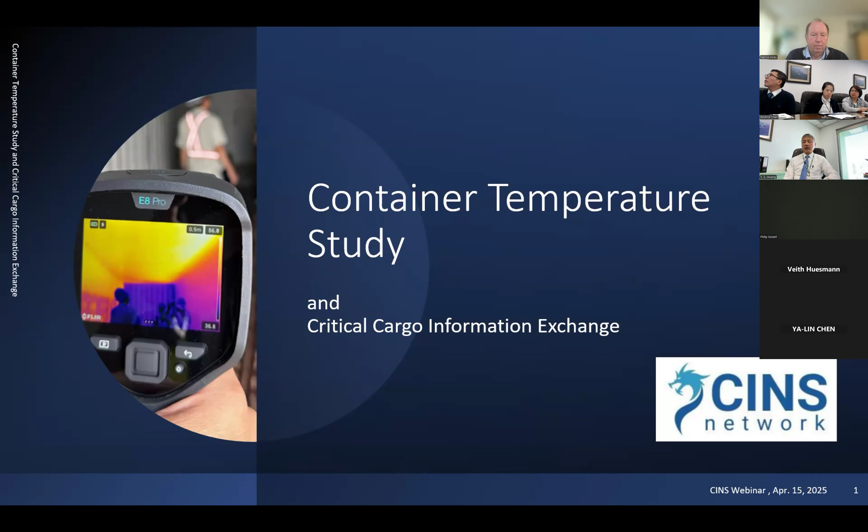Thank you. So today's topic is container temperature study and critical cargo information exchange, which we feel are two crucial elements to build a safer container transportation environment for all working in this industry. Next page, please.

In today's briefing, the first part is the fire risk and the information exchange, which we will explain more in the following briefing. The second part will be two cornerstones we feel are crucial: one is the understanding of container temperature, and second is the attribute code that SMDG developed, still under development, but I think it is also ready for all stakeholders to adopt. The third part, the main part, is the update of the temperature study. The next will be the attribute code SMDG, and number 5, ongoing task, and lastly, a safer environment. That's what we are looking for. Next page, please.

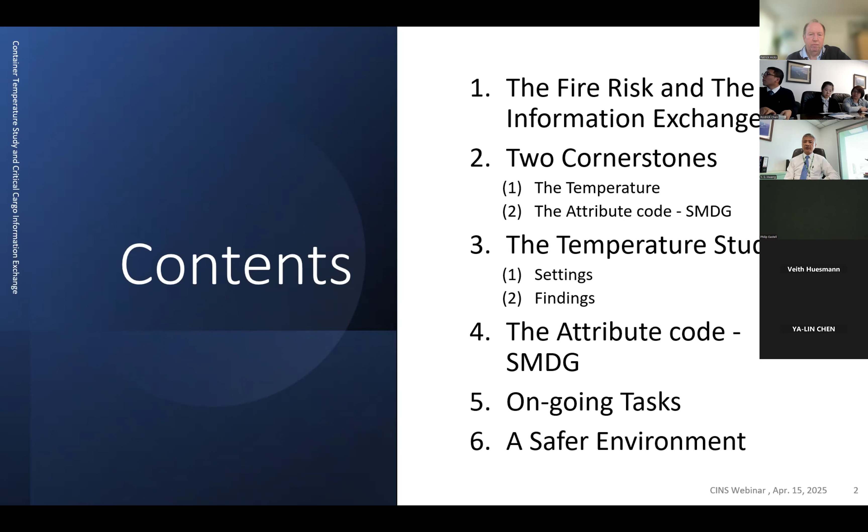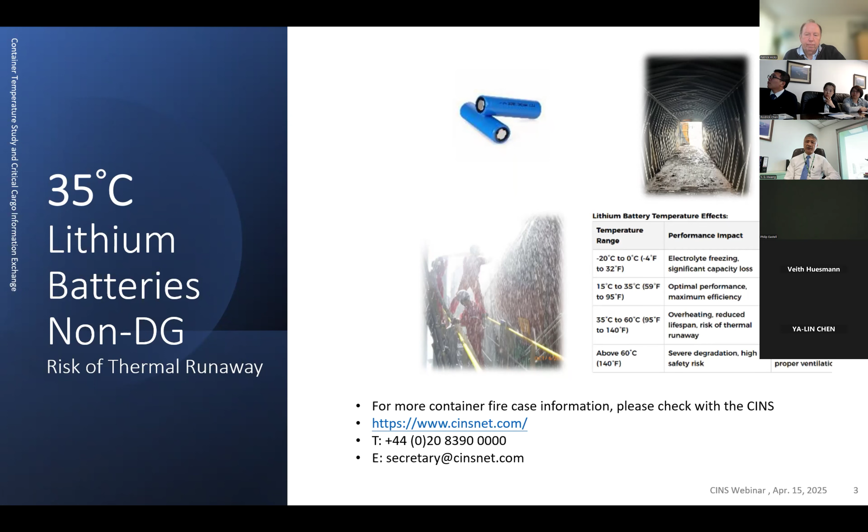35 degrees centigrade, that's what we learned from some battery manufacturers. Not all of them - you may not find a specific storage temperature guideline from all the battery makers, but I think 35 degrees is, in general, from the battery maker's point of view, a safe limit of storage for lithium battery, non-dangerous goods, for a certain period. Otherwise, if you exceed this threshold, you have a risk of thermal runaway, which means a container fire will likely follow. Next page, please.

We also know 35 degrees is the melting point of cocoa butter, of course, non-DG. Next page, please.

For the terminal side, that's what we learned from China terminal operators. They have a 35 degrees mechanism to activate the water system to cool those temperature-sensitive dangerous cargo in the terminal. Last August 2nd, the highest temperature was 40 - it's pretty hot, pretty warm in mainland China at that time. And you can see from the picture, they have a fixed system to cool those temperature sensitive cargo. So another 35 degrees for your reference.

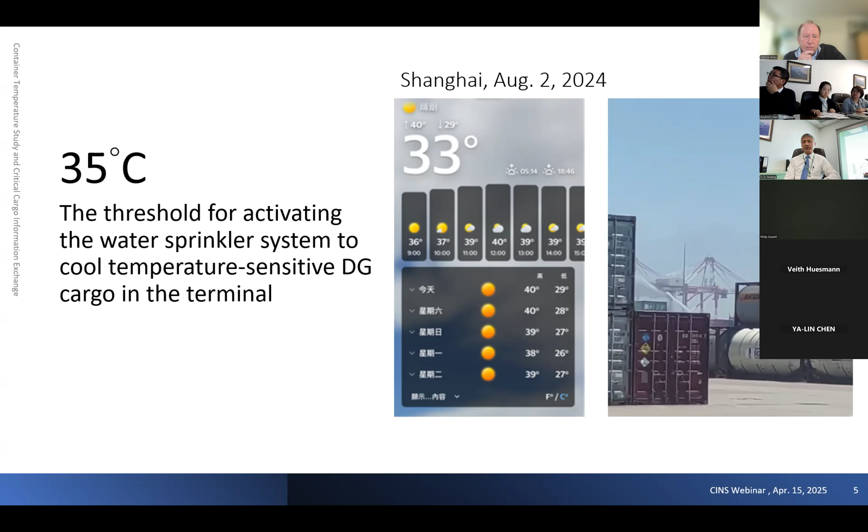Next page, please. And as we all know, 55 degrees centigrade is the well-defined source of heat in the IMDG code. So this is the two very specific temperature thresholds we are looking at. Next page, please.

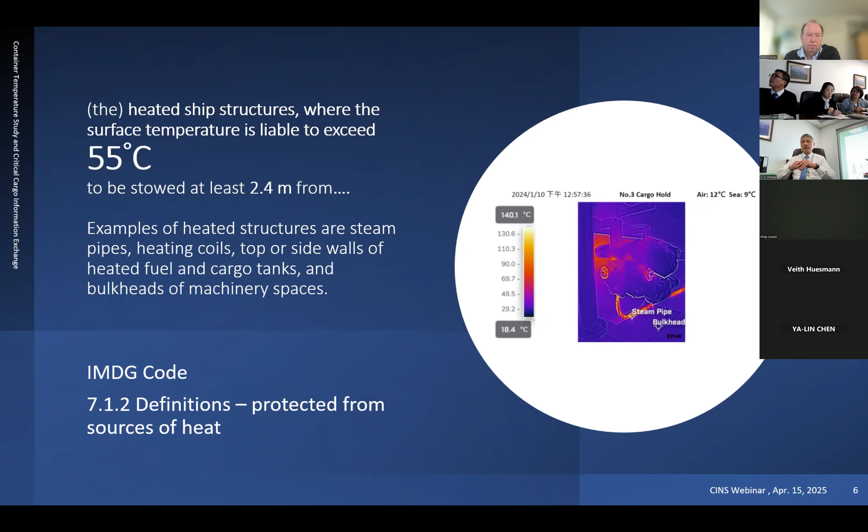So the fire risk and the information exchange - I think a better information exchange flow by adopting the SMDG developed attribute code among all stakeholders will be very helpful for fire risk management. Next page, please.

And I will invite Roger to explain you more about why we feel it is crucial to have a better information exchange. Roger?

So we can see two pictures here. In the left-hand side, you can see one of our vessels, a 24K vessel serving Asia to Europe trade at the moment. So this is one of her voyages. We took all the dangerous goods on board and marked them clearly from our vessel structure directly in our software.

So you can see all those red containers are dangerous goods. In the right-hand side, you can see some yellow containers, which are sorted from our booking system. They're actually non-dangerous goods, but critical cargo, such as non-DG lithium-ion battery, cocoa butter, or carbon black.

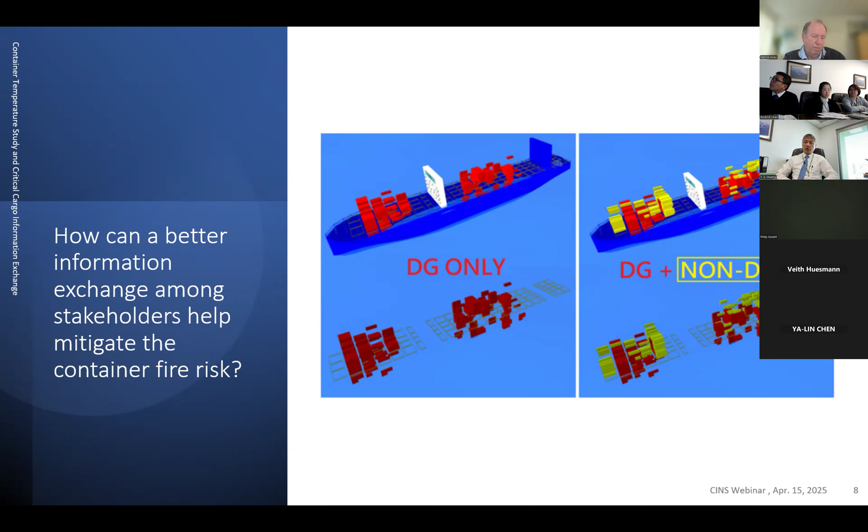Next page, please. So that's the two cornerstones I mentioned earlier. One is the understanding of the temperature, and the other is the attribute code, the implementation of the attribute code.

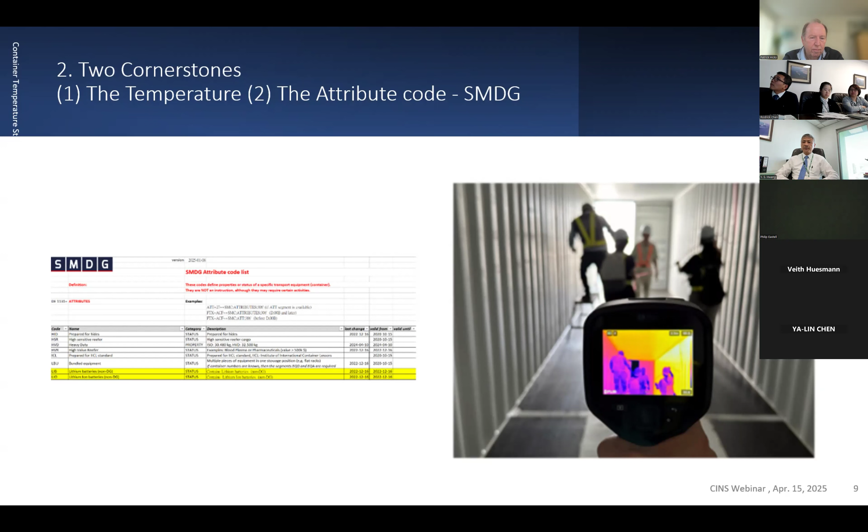Thank you. Next page, please. Now, this is the main body of today's briefing, the temperature study. We're going to give you an update. Please feel free to raise your hand if you have any question. Just stop us.

Thank you. Then I will give the floor to Justine. Thank you, Captain. So it's my turn now. So after our colleague Wyatt delivered two cornerstones in our presentation, let's get into the most important part, the temperature study. So before we start, we want to firstly mention our principal rule, IMDG code.

It defines 55 degrees as the threshold temperature. Based on that, we observe direct sunlight versus heated ship structure. And we also learn the definition of protected from source of heat in IMDG code, chapter 7.1.2. But in our experience and study, we think the critical cargo threshold temperature of 35 degrees also deserves our attention.

So we would like to research more information through our studies. What we aim to understand is first, how heat sources, such as direct sunlight or nearby ships' heating structure, impact the temperature inside of a container. And second, how the container's internal climate changes during its transportation and the associated cargo fire risk.

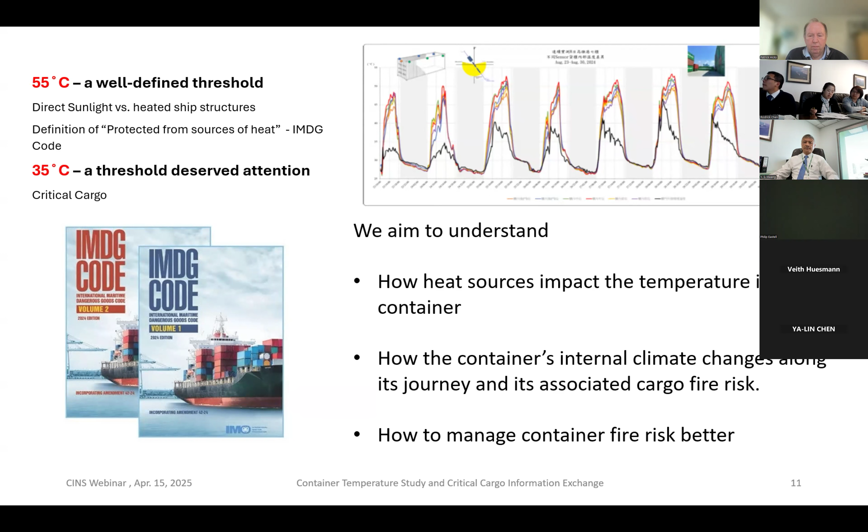And last, how to manage container fire risk in a better way. Now we are going to introduce our settings and findings.

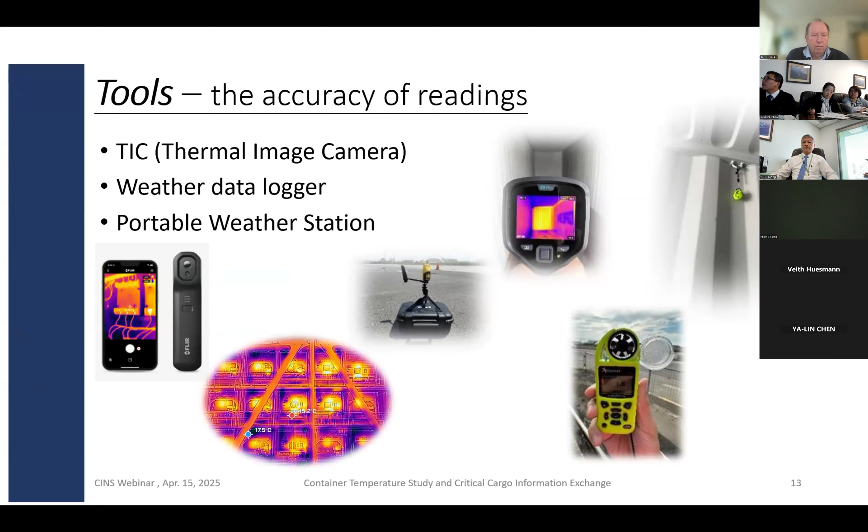Firstly, we want to introduce these helpful tools and equipment we are using: thermal imaging camera, which we can just call TIC, weather data logger, and portable weather station.

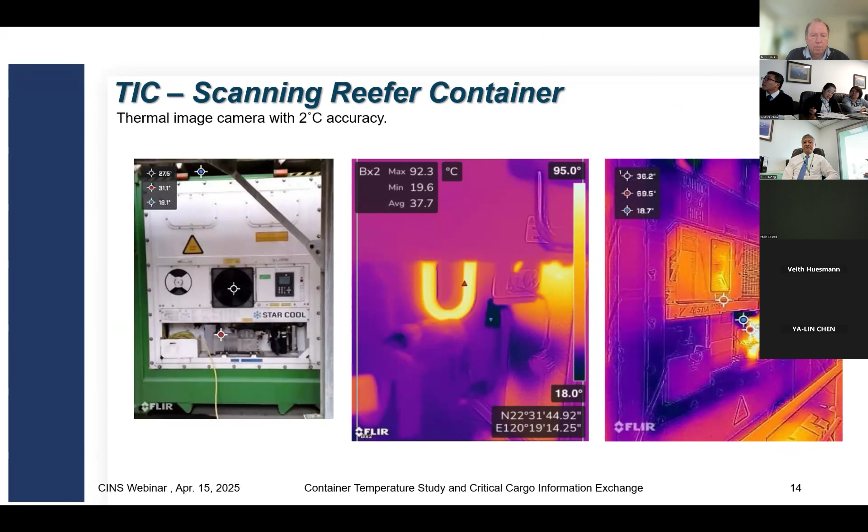Here we can see an operating reefer scanning by TIC. We can easily find the heat spot, especially for the heating pipe and engine unit. As you can see in the photo in the middle part, this is the highest temperature, 92.3 degrees, we got.

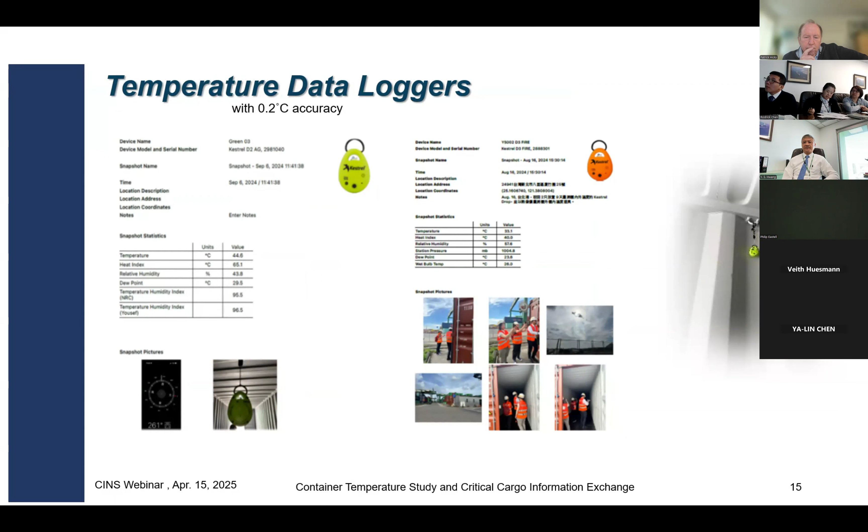And next, this is the temperature data logger we used. It can record most climate parameters timely. We put these loggers in different positions and try to get objective data to have comparison with the environment.

And last, portable weather station. What we used for this weather station, despite the climate parameters, it can record wind force and direction with GPS position, which would be helpful to understand the ambient environment and have objective standards.

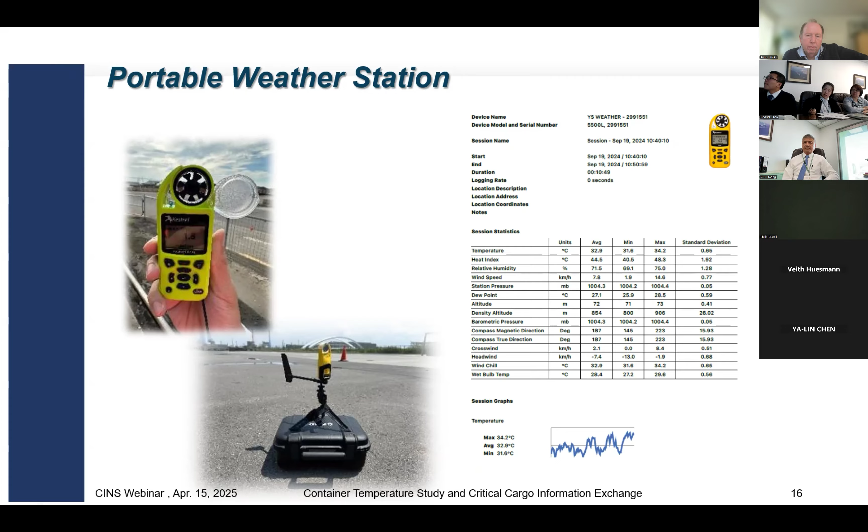So using these tools, we have conducted a total of 28 surveys until now. As Wyatt just mentioned, this is an ongoing task. We're still doing it in 2025, and we survey in various places. You can see we collect this temperature data on land, at sea, on ship, and in container. Based on these different settings, we got many interesting findings.

So we picked 4 from 28 surveys to elaborate in more detail and hope to give a quick overview. So Roger, you may take the floor. Thank you, Justine. So then it's my turn.

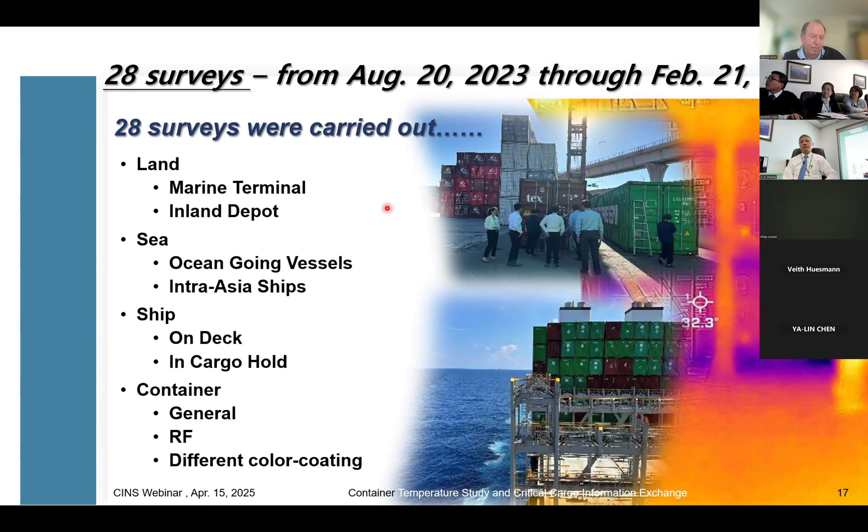So we put 2 data loggers outside of the depot to get the ambient climate data. And in all containers, we put 1 data logger inside, hung in the middle. So then we can make a comparison for all these 3 different containers.

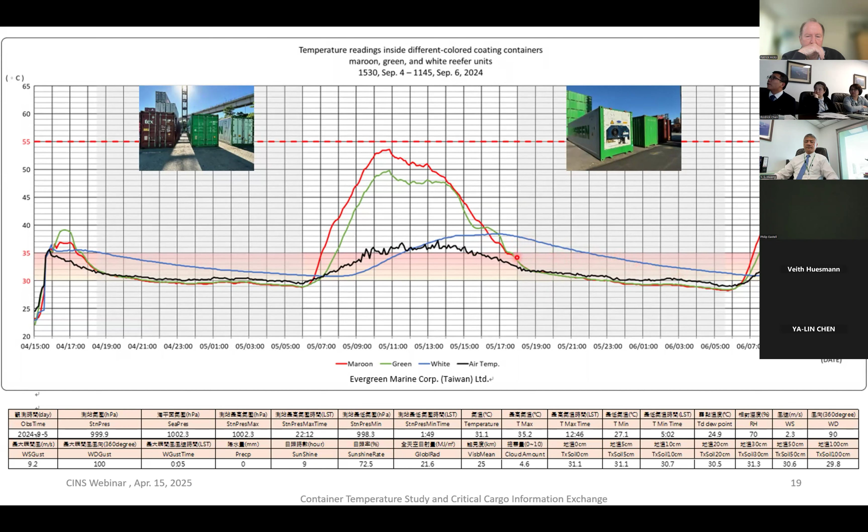Then we jump to the second one. We elaborate more from the first study. We block the whole container area in one of our great terminals in Kaohsiung. We put 9 containers here.

You can see the picture showing here. One is unprotected, one is topped, and one is protected. And again, we put the reefer and the maroon containers there.

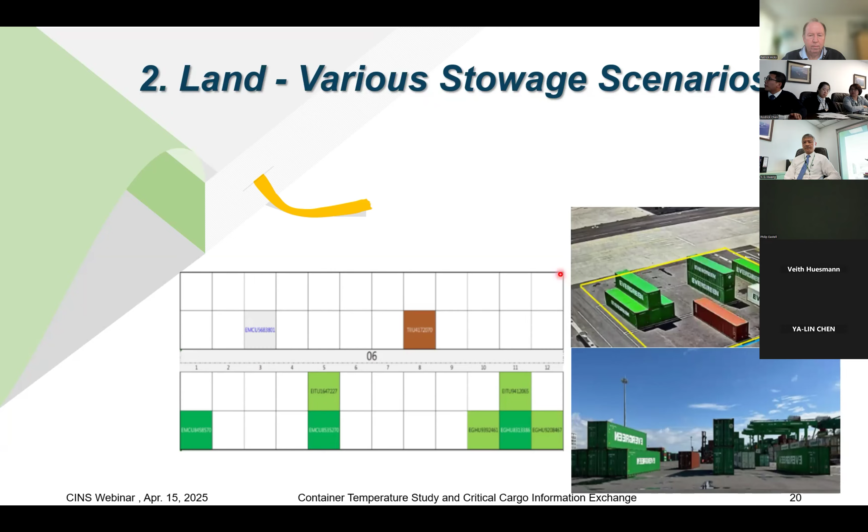Here shows how we put the data logger inside our container. From the left-hand side, you can see we put all the data loggers in the lashing rings, so we can get all the data to compare all the temperature distribution in the container.

On the right-hand side, we also put each container's one data logger in the middle part of the container, leaving 65 centimeters of space from the ceiling. We try to gather the middle temperature to make comparison for all the containers.

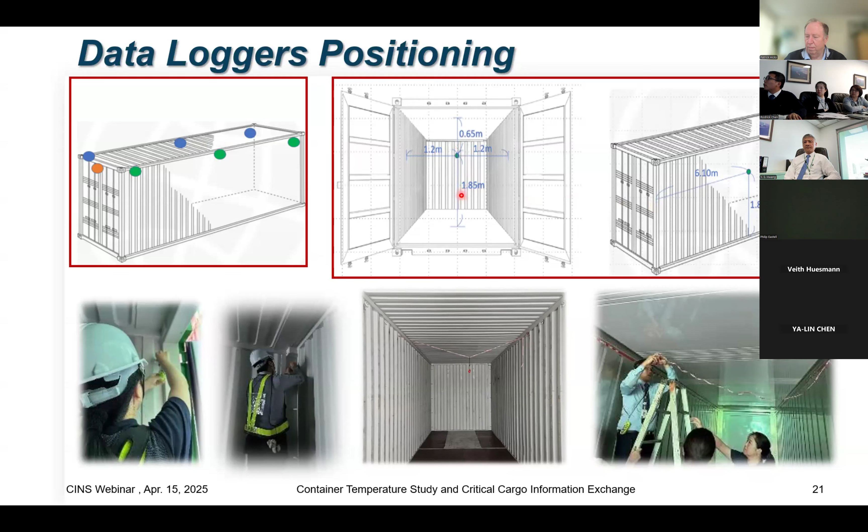This is the actual true course for our containers which put in the yard. We can see if we stand in front of the container door, on your right-hand side is the sunrise, and on your left-hand side is sunset. This gives us a clear picture of when the sunlight comes from which direction.

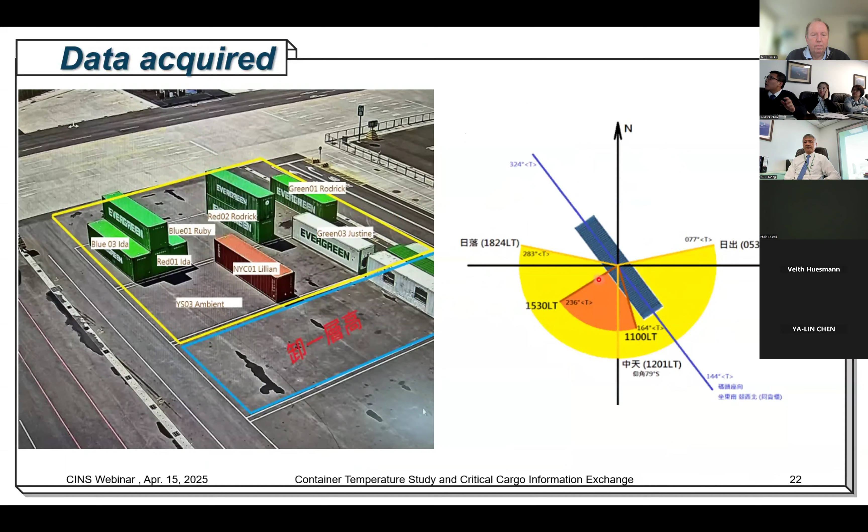So here is the data we acquired at that time. We took TIC readings. The experiment took around a week, but we took the TIC reading on the 27th of September. You can see at that day, the sunrise is at 5:38, but when we took the reading, it's at 15:00.

So which means at that time, if we face the container door, the sunlight is actually coming from my left-hand side. Please be careful, at that day it's partly cloudy, not really a sunny day. And also we got wind force there, 19.0 kilometers per hour.

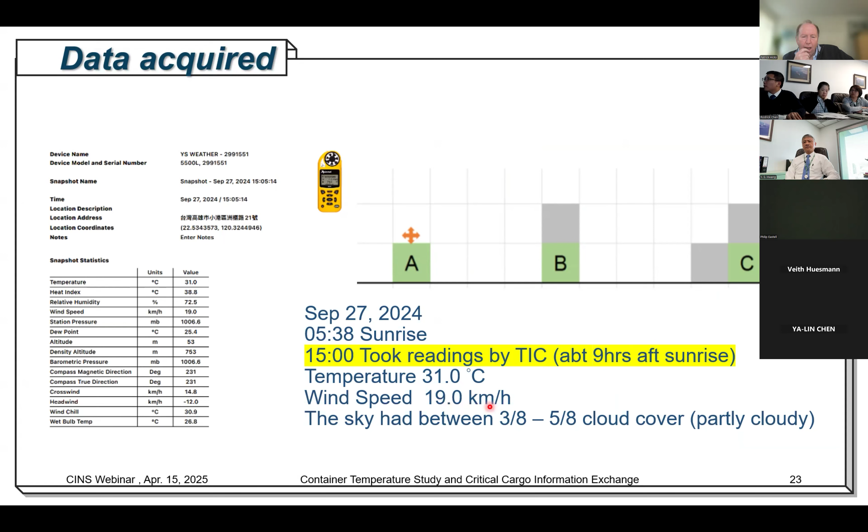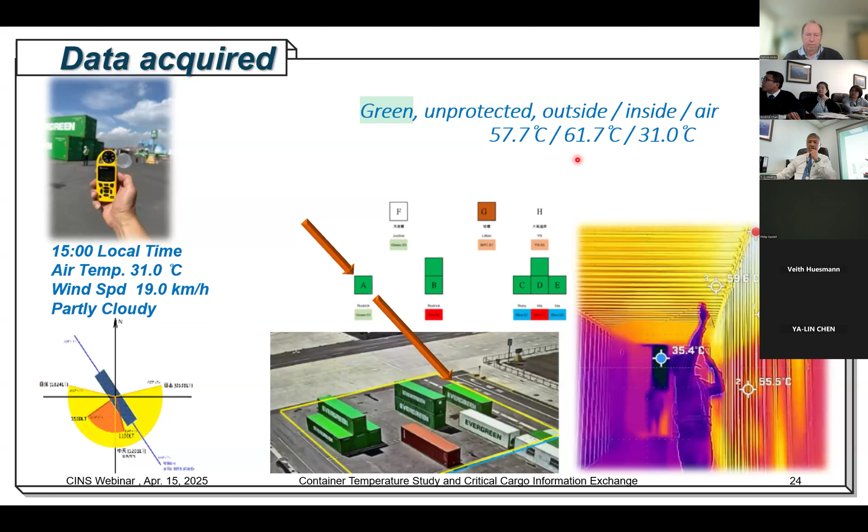So now we look at our TIC reading data. The first one we took is container A. We can see here it's a totally unprotected container. The TIC reading from outside is 57.7 degrees Celsius, and inside is 61.7 degrees Celsius. So inside temperature is a little bit higher than outside, and it has already reached the 55 degrees Celsius threshold, which could be very dangerous.

So if we really put critical cargo inside of a non-operated reefer, is that really helpful? It's a question at the moment.

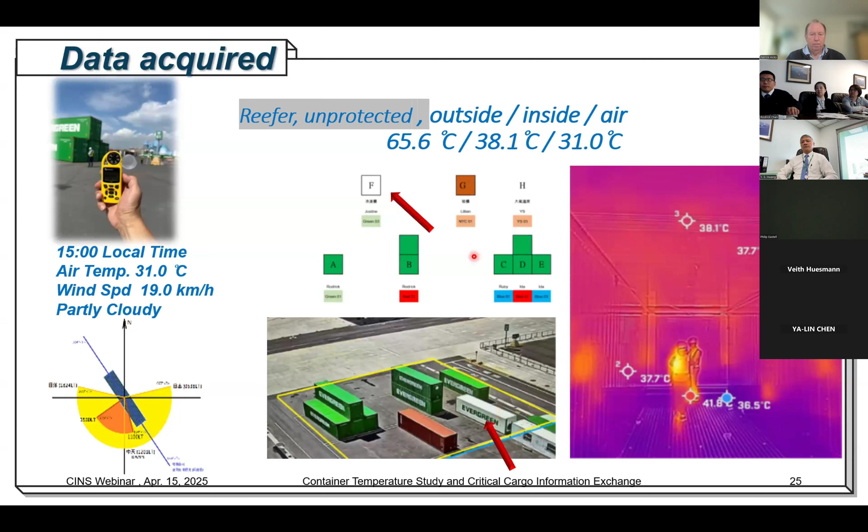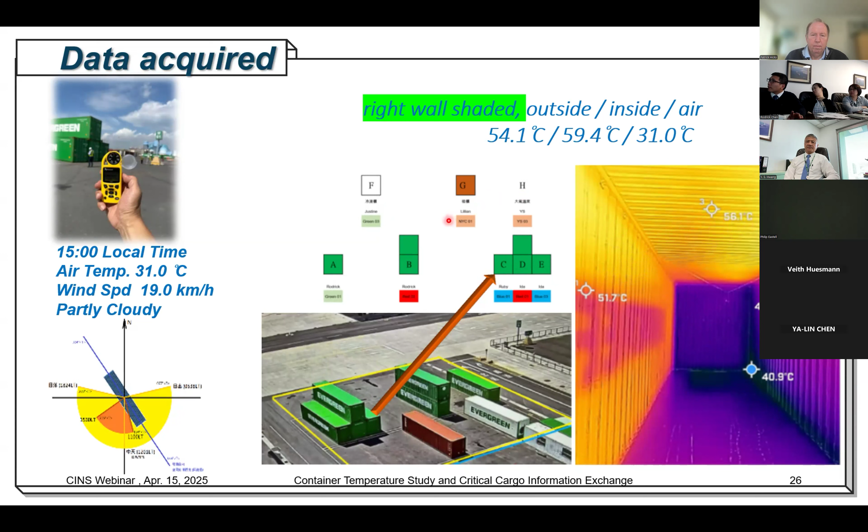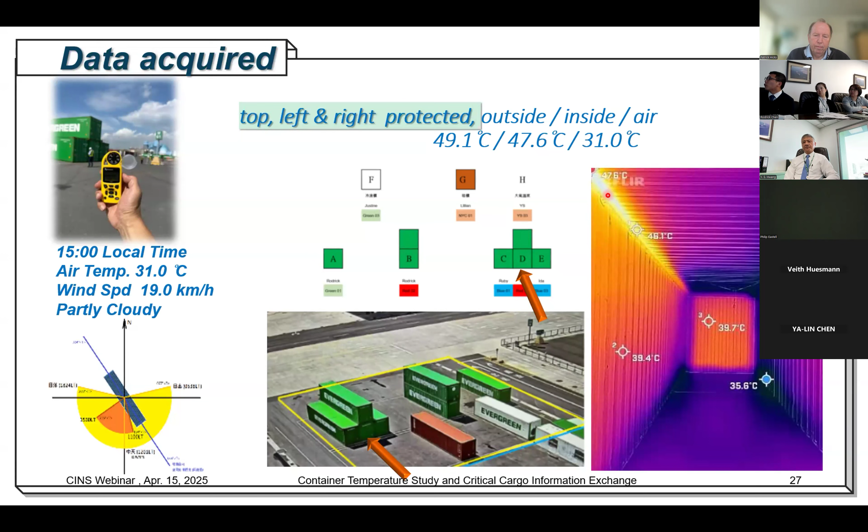Then we look at container D, which is totally protected. We can see the temperature dropped very sharply: outside is 49.1 degrees Celsius and inside is 47.6 degrees Celsius. Looking at the TIC reading picture, the highest temperature comes from the top left side, the sidewall, which is actually the container light, leaking from the protected area.

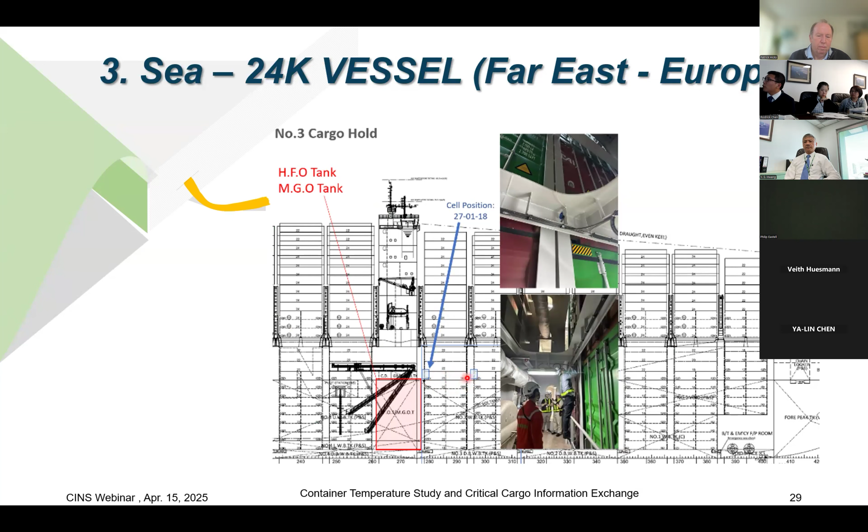This is the third study we made, for our 24K vessels. We transfer to our vessel site at sea. This vessel is also served in the Asia-Europe section route. We put 2 data loggers on our vessel in cargo hold number 3: one in front of our fuel tank, and another kept at a 40-foot unit interval in front of the first one.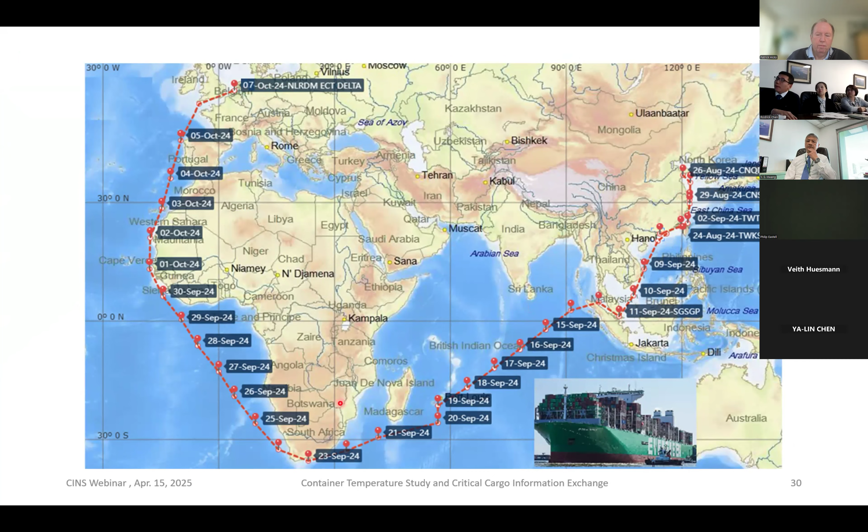This is her actual route, started from August and arrived in Europe in October. Throughout the summertime she went through Asian ports, from higher latitude to lower latitude. This is her return route, started October 19th to December 7th, covering her whole voyage.

We gathered 106 days of data from those data loggers. We can easily see that for both the blue line and the orange line, the blue line is the data logger near the fuel tank, and the orange line is the one in front. The blue line is actually higher than the orange one, which means the heated structure really affects the temperature inside the cargo hold.

We also looked at air temperature and sea water temperature. The air temperature is not very relevant to the cargo hold temperature; the trend more or less follows the seawater temperature, which affects the cargo hold temperature more. In this chart we also found that if you're serving in a high latitude area, the temperature is very stable, especially in Europe. But if the vessel serves in a low latitude area, the temperature is always near the threshold, which could affect critical cargo if placed inside the cargo hold.

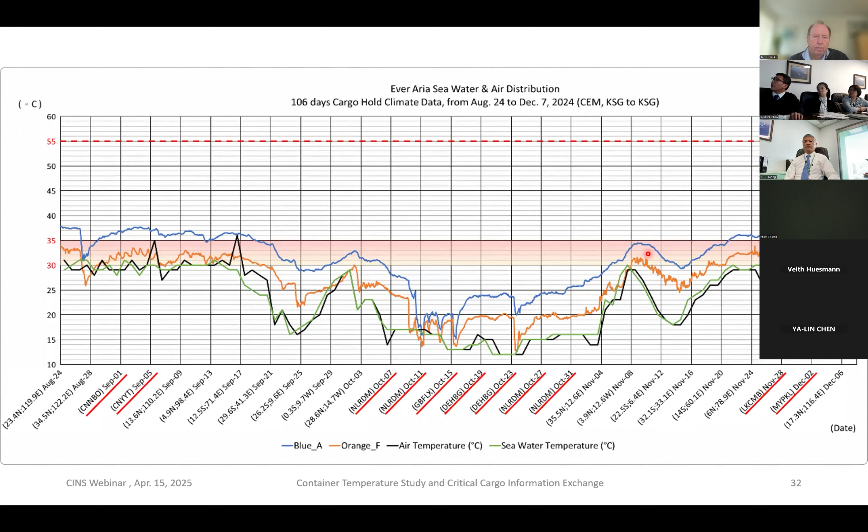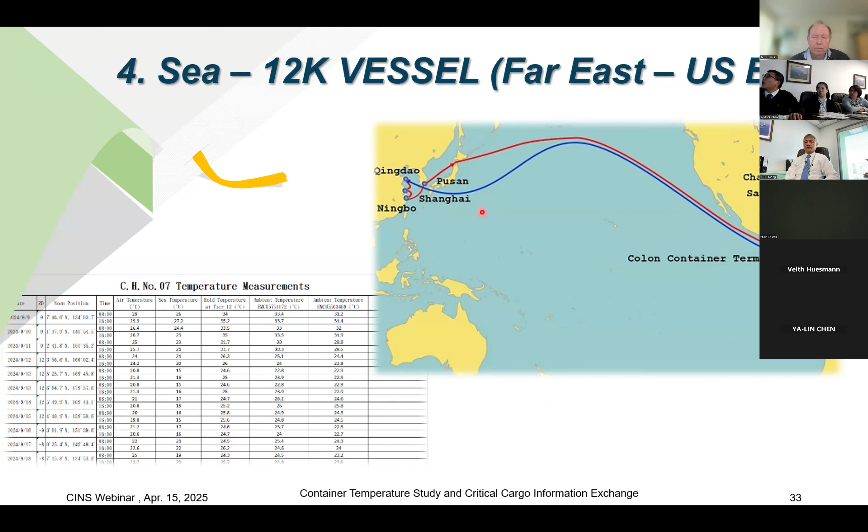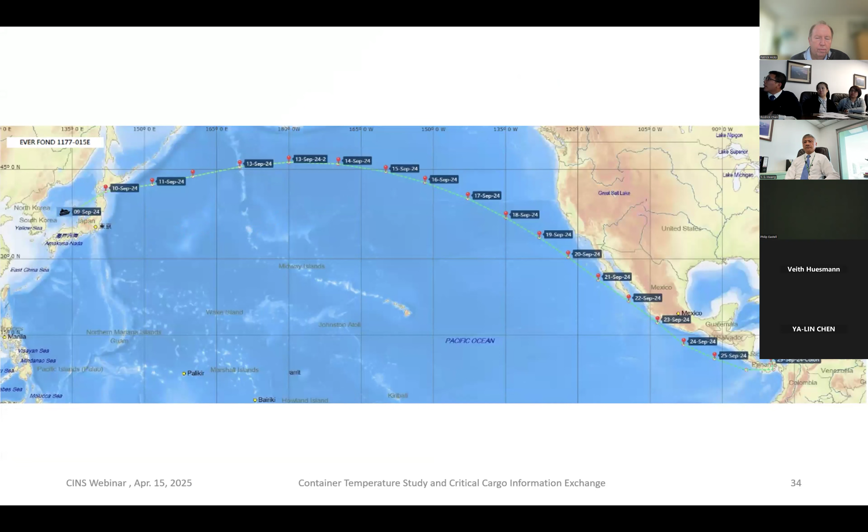So we made one study for our Europe trade vessel. Then we also tried to sort data from our America trade vessel. This is a reading from our 12K vessel, from Far East to US East Coast. The voyage started in summertime, September, and ended in October.

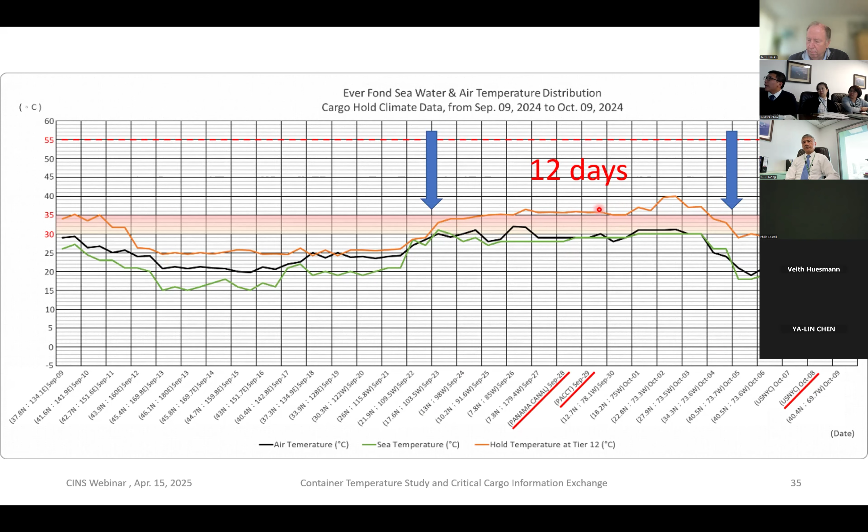We can see the voyage started from high latitude, so the temperatures dropped sharply compared to low latitude. In this study, it started from 13 north latitude to around 30. Over a total of 12 days, the cargo hold temperature always reached the threshold of 35 degrees Celsius. So we have to think about it: if we really put critical cargo in the cargo hold, it might always keep the temperature at the threshold, which could get dangerous if a real case happens.

From all these studies, we get a few notes to share with all our participants. First, other than container type, the external climate, the geographic location, and the seasons are crucial factors affecting the container's internal temperature. Also, sunlight is a key factor.

Second, many aspects must be carefully reviewed before determining the stowage of critical cargo on or under deck of a ship. However, the temperature data collected suggests that the cargo hold temperature may stay over 35 degrees Celsius for days, if not weeks, subject to the itinerary. This fact may deserve attention.

So as we just showed, whether in the cargo hold is really better than on deck, we are in doubt at the moment.

Third, suppose the contents of those containers, which are temperature sensitive and critical to fire risk, are visually identifiable on the individual stakeholders' software. In that case, it will help the parties involved make safer stowage arrangements and facilitate better container fire management. As shown in the beginning, which YS mentioned, those pictures - for those critical cargo, if we can show it really clearly on our software, then maybe we have more chance to have better storage and also better monitoring for those containers.

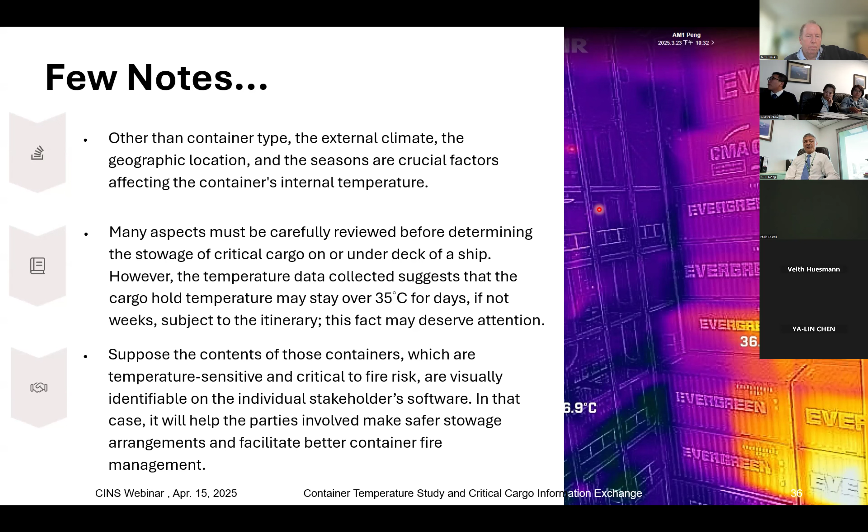So these are a few notes from here, and I want to hand the floor back to YS. Thank you, Roderick, very good. Can we go to the next slide, please?

All right, a quick recap. Next page, please. So we feel visualization helps fire prevention. We need to see where those non-IMO cargo is on board ship, in the terminal, or in a depot.

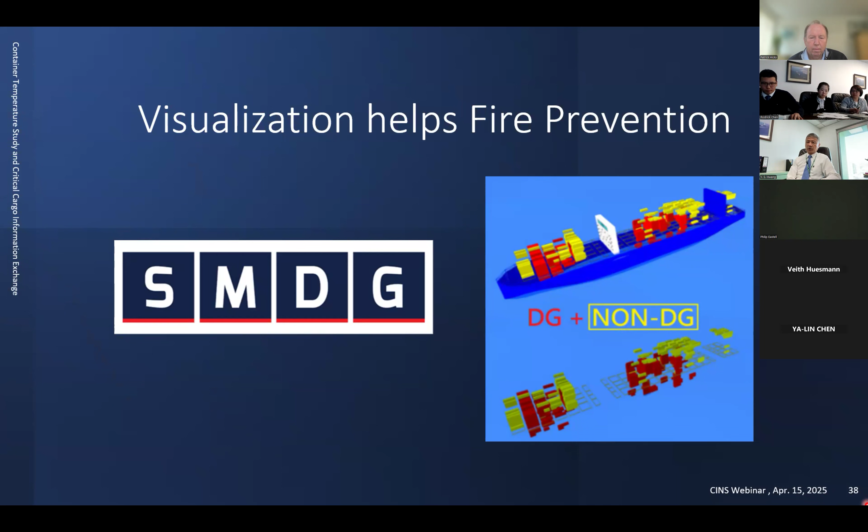Next page, please. So again, those are the two temperature thresholds we are really focused on: one is 35 degrees centigrade, and the second is 55 degrees centigrade. For information exchange, both at sea and inland, we need to promote the attribute code being used in the EDI message. And for the stowage on board a ship, for on deck or in hold, we may have more consideration before making a decision for those critical cargo.

Next page, please. In the following section, I will invite Yvonne to elaborate more about the information exchange. Yvonne, can you please? Thanks, Wes.

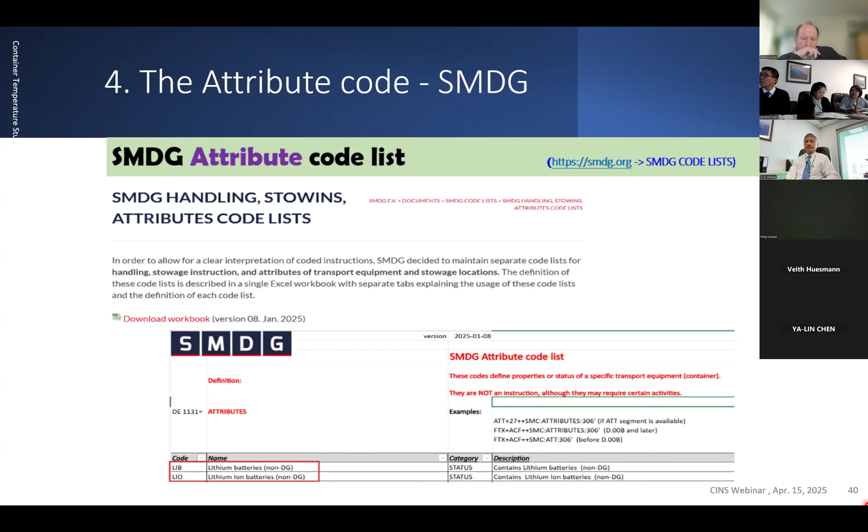From previous slides, we can know temperature is a very important element for critical cargo. And SMDG already set up the attribute code list under their website. So I think we can start to follow the attribute code to show it under EDI Exchange.

Here I show you three common critical cargo attribute codes for your reference. First one is LIB, stands for lithium battery, non-DG. Second is COB for cocoa butter and cocoa beans. Third, LIO stands for lithium ion battery, non-DG.

So we can use this attribute code under EDI Exchange to let all stakeholders know this is a critical cargo. We can also find on the latest version, 00B, for Coparn, Codeco, and Coarri EDI messages, SMDG already set up - we can show the attribute code information under the FTX free text segment plus ACF to show the additional attribute information. So we can add this information under EDI Exchange to let all stakeholders know this is a critical cargo as well.

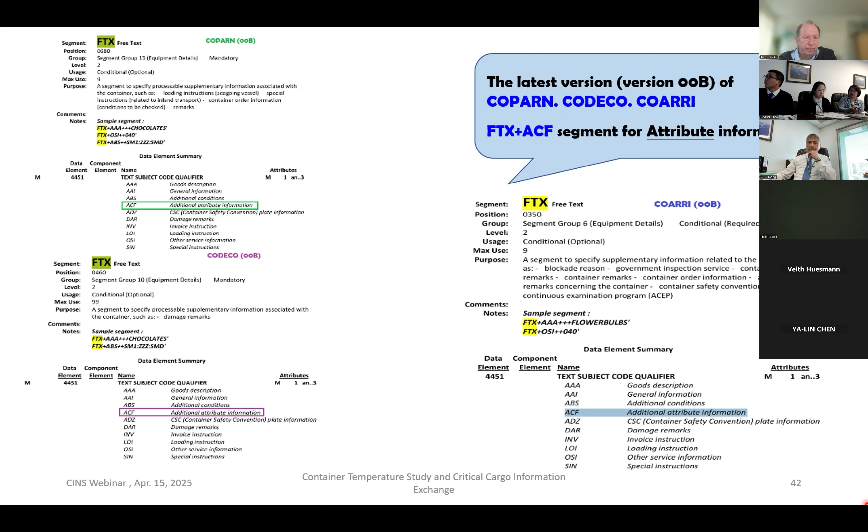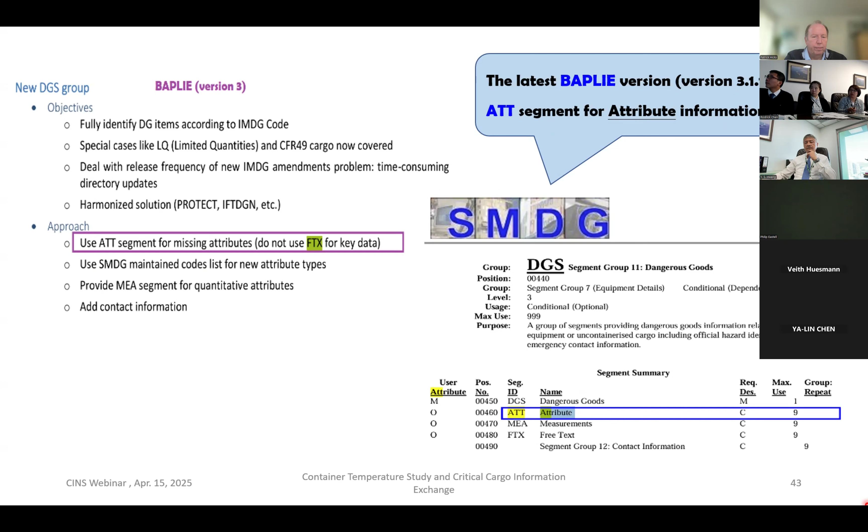Then for the latest Baplie version, version 3, SMDG already set up, we use the ATT segment for this attribute information. This is a little different from the previous Coarri, Codeco, and Coparn message. We can show the attribute code information under the ATT segment to let all stakeholders know this is a critical cargo.

Here I use part of the container information flow to show you how we do the EDI exchange. When we get the information, the most important thing is we have to get this information from the shipper. When the shipper takes a booking, they must provide the correct commodity. Then the booking desk can base on the correct commodity to find the correct attribute code to well maintain it on the booking data. Then the box operator and carrier can base on the attribute code to well mention this on EDI Coprar exchange for cargo booking forecast.

When the box operator provides cargo booking forecast by EDI Coprar, they can well mention this attribute code under FTX plus ACF segment to advise the vessel operator this is a critical cargo. And also when the carrier provides Coparn data and Coprar data, container loading list to terminal, they can also well maintain this attribute code information under FTX plus ACF segment to advise the terminal this container is a critical cargo.

Then after the container was actually loaded, the terminal will send back EDI Coarri, container loading confirmation, and Codeco gate moves back to carriers. The terminal can also well mention this attribute code information under EDI Coarri and Codeco FTX segment to show the attribute code information. And also after vessel departure, the terminal will send departure Baplie message to carriers and also to the ship. They can also well mention this critical cargo's attribute code information under the ATT segment to let all stakeholders know this is a critical cargo.

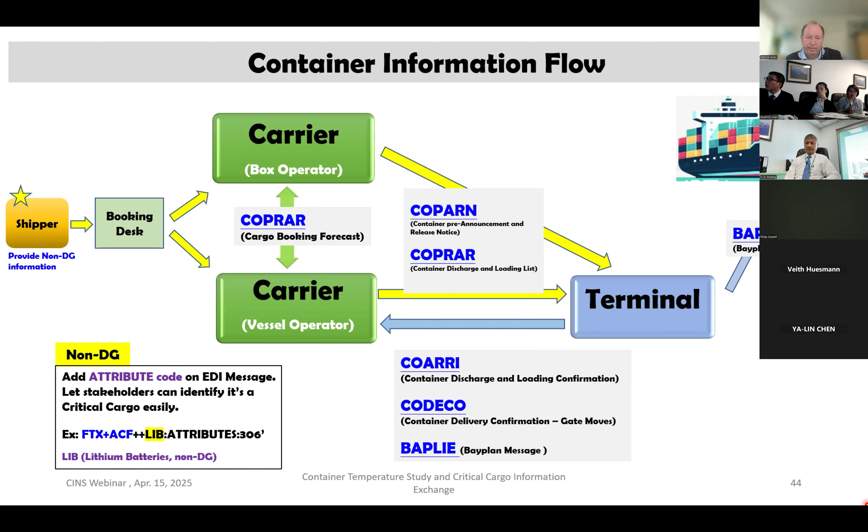So we already have the attribute code set up by SMDG and also standard EDI format to show the attribute code information. So the next step is to implement attribute code information under EDI exchange. This will give all stakeholders, including carriers, box operators, vessel operators, terminals, and shippers, a better chance to pay more attention and take better precaution for critical cargo.

Because safety is always our first priority for the maritime industry, let's work together to move on to the next step. Thanks, I hand over to Vice. Me again? Okay, thank you.

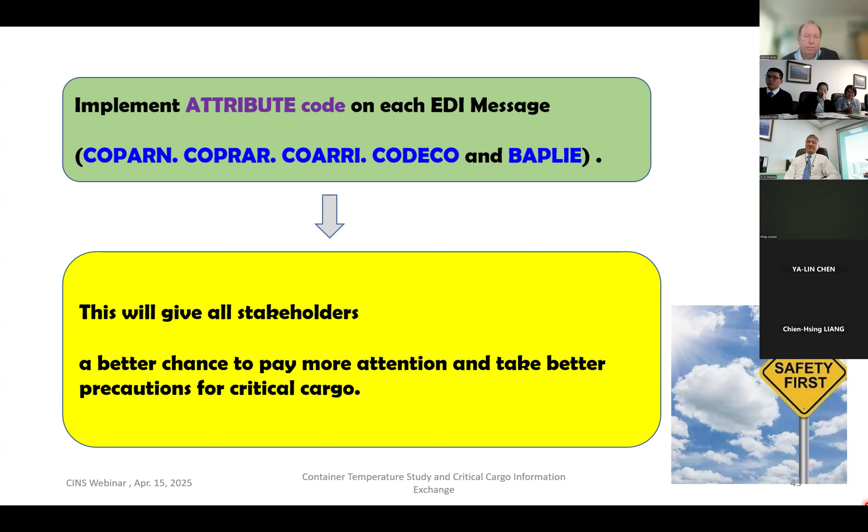Very good, Yvonne. So the ongoing tasks that remain: one, the temperature study, we're still doing it. We're still analyzing the collected data. It's quite time consuming. We are conducting more surveys even while this webinar is going, and we are open to share what we get from those data with you.

We sincerely hope that you can give us some advice from your point of view. Maybe you know some better tools that can be used for those surveys, or you may have a very different interpretation of those collected data. Please let us know. We are eager to learn from you how we can do this job better.

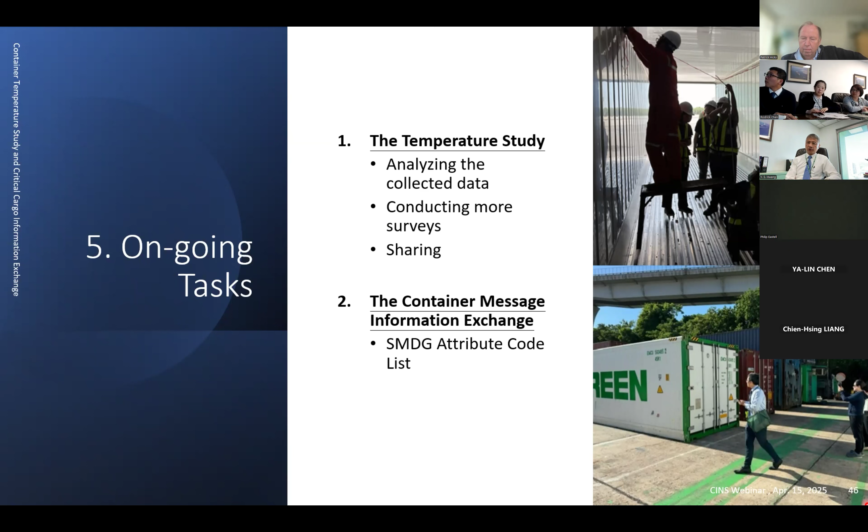The second thing is the container message information exchange to adopt the SMDG attribute code list. But just to be clear, we are not quite there yet for system-wise. Still, we have some internal challenges. However, we do believe that's the direction we should move forward. Next page, please.

This is the destination we want to arrive at: a safer environment for all women and men working in this industry. It doesn't matter if on board a ship, in a terminal, or in a depot, or even a trucker or the rail company. People should have the right to enjoy a cup of coffee rather than fighting a fire. So I do believe if the industry and stakeholders work together, we can build a safer environment.

Next page, please. We conclude our briefing today. We are still doing the container temperature study, the surveys, and we are also working on the implementation of the SMDG code, trying to identify those non-DG but critical cargo.

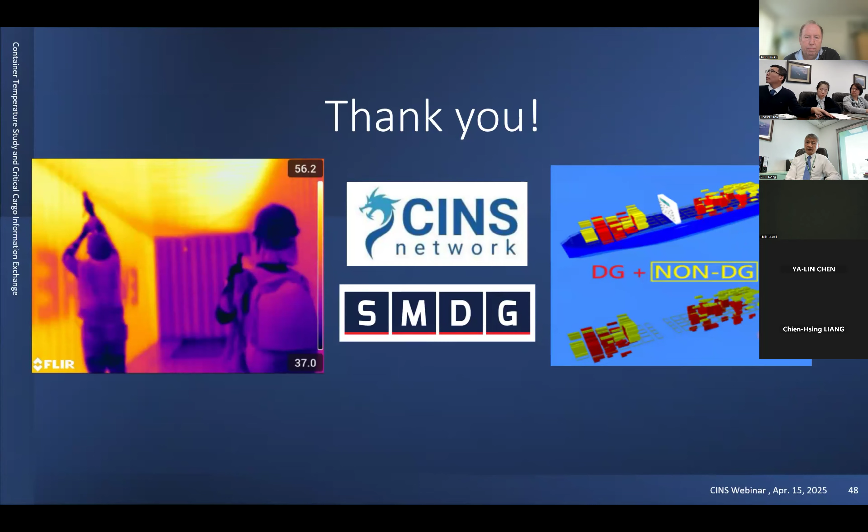And on the right-hand side of the screen, that's what we want to achieve—on board ship, or again, in the terminal or in the depot. Next page, please. Do we still have a next page? Oh, we do have, okay.

It's exactly 3 weeks stayed in a marine terminal. So we feel that for the terminal, it is also a critical element when we talk about container temperature and container fire. Next page, please.

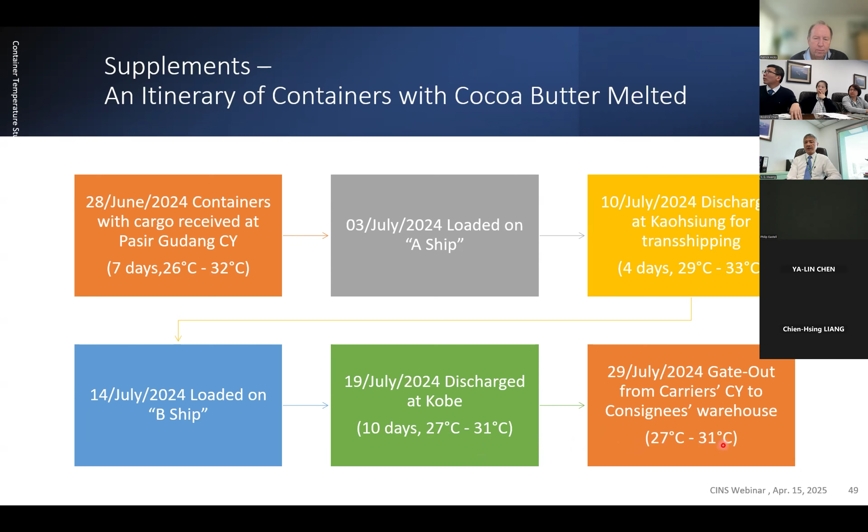This graph shows the container's itinerary for your better understanding. Thank you very much, I think with that, that's all we prepared for today's webinar. Now we welcome any questions you may have.

Patrick: Yeah, that's great. Thank you very much, Weiss and Roderick and your colleagues for a really interesting and very in-depth presentation, a lot of good data there. And like you say, it'd be good to get some other companies involved in sharing their experience. So as you say, we've got time for some questions and some discussion.

So people are welcome to either put their hand up or make a comment on the chat line. Let me just ask a couple of things to start with. So when you're measuring the temperature of the containers inside and outside, the containers were normally empty containers, is that right? Yes, that's right.

Does it make any difference whether there's cargo inside or outside? Does that make any difference? I think so, yes, it will make a difference. So we are considering that the next step we may use smart containers for those loaded containers to record the temperature change within that container. But however, there is still a limitation because it depends on how many sensors you have within a smart container.

But that's certainly our next step. The temperatures were measured at the top of the container and the middle, but not on the floor of the container. Does that make any difference?